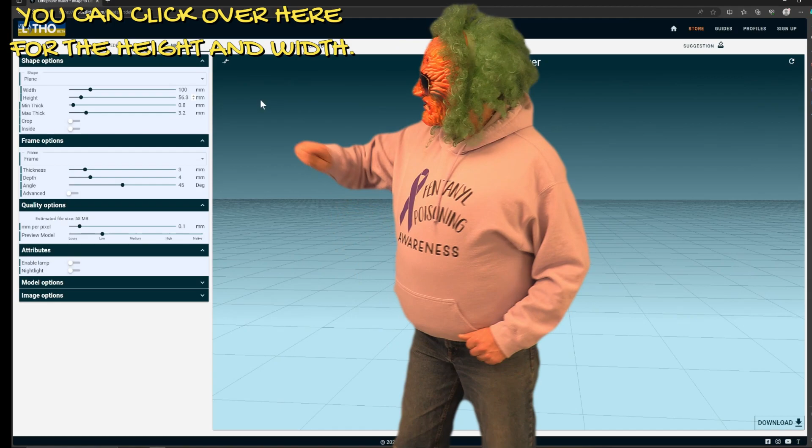Alright, let's spin this bad boy around. You can click over here for the height and width. I'm going to change mine to 100, but remember to log these numbers down, write them on a piece of paper. When you're done with that, click down here to download, then tap over here for Lithophane.

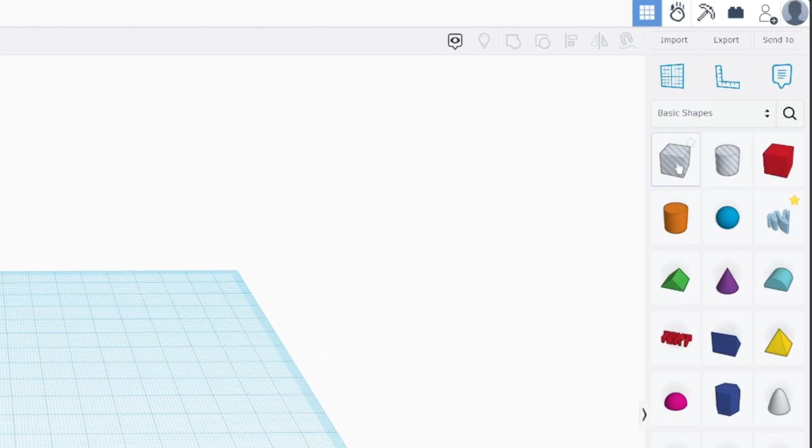Okay, I'm going to show you real quick how to make our brackets. Take a hole here. The hole represents our lithophane. My lithophane measured 177.8 millimeters. I'm going to transfer those values to my hole. My lithophane measures 100 millimeters, so I'll make my hole 100 millimeters. My lithophane is 3.2 millimeters wide, so I'll have to make my hole 3.2 millimeters wide. That's going to be our lithophane.

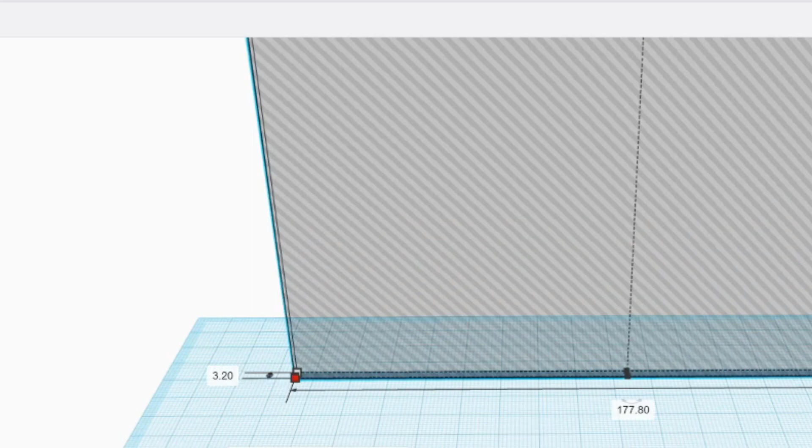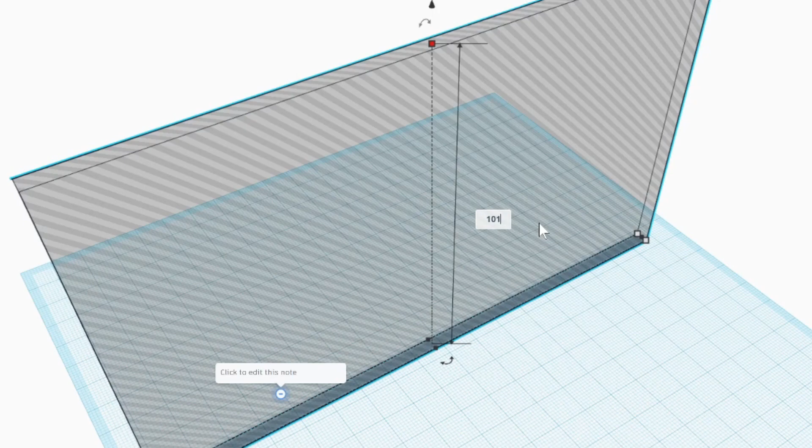But one problem I always run into is when you use your 3D printer, you've got to give yourself an extra millimeter. So I go 4.2, 178.8, and the top 101. That gives us a little wiggle room.

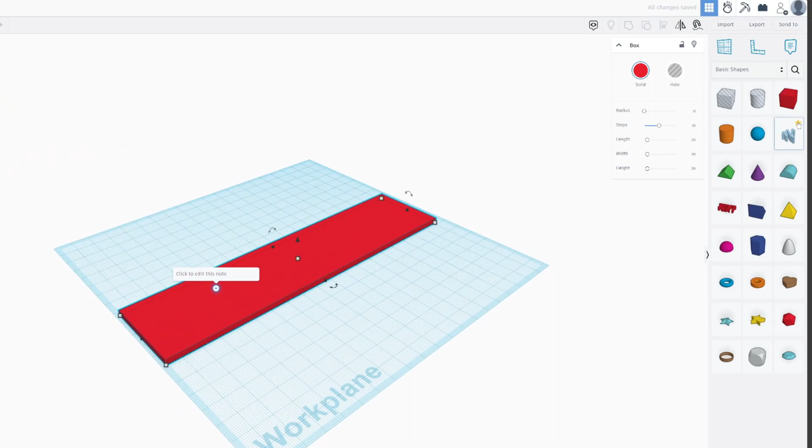Take this, put it aside. We're going to get our bottom: 45, 190, 3. 190, 3. We'll make this 25 high.

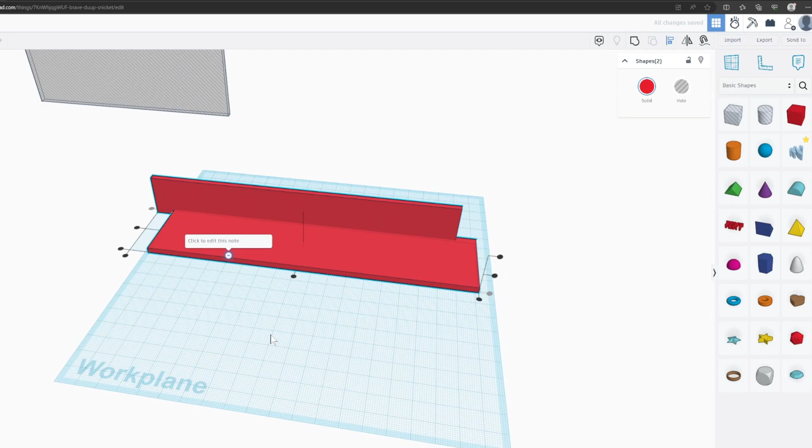Click on the tab to align to the front, and click on the tab to align to the middle. Let's group them. Now let's work on the front.

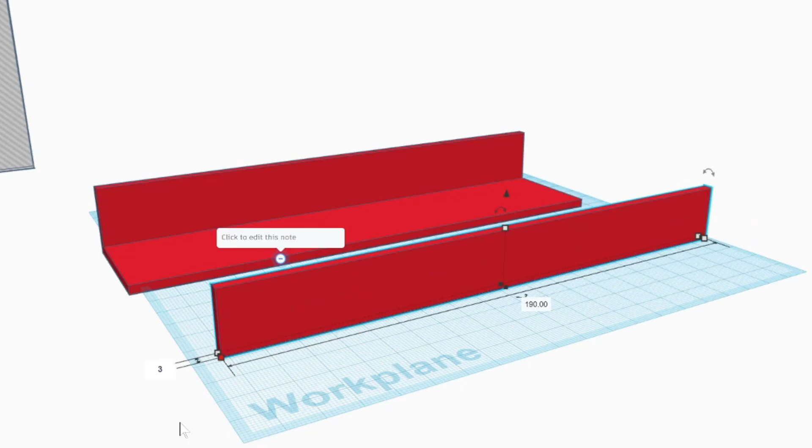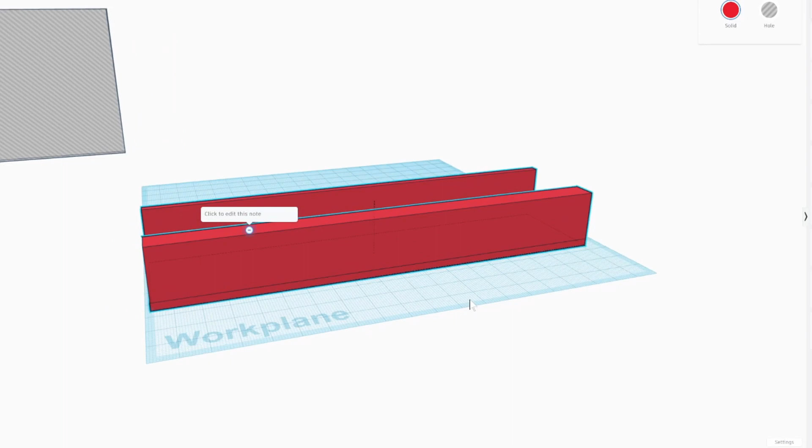190. Make this 3 wide. Actually, make this 10. Make that 25 tall. Now select our pieces and go up to Align. Click on the tab to align to the front, and click on the tab to align to the middle. That looks good. I'll select them, and then we're going to group them, make them one piece.

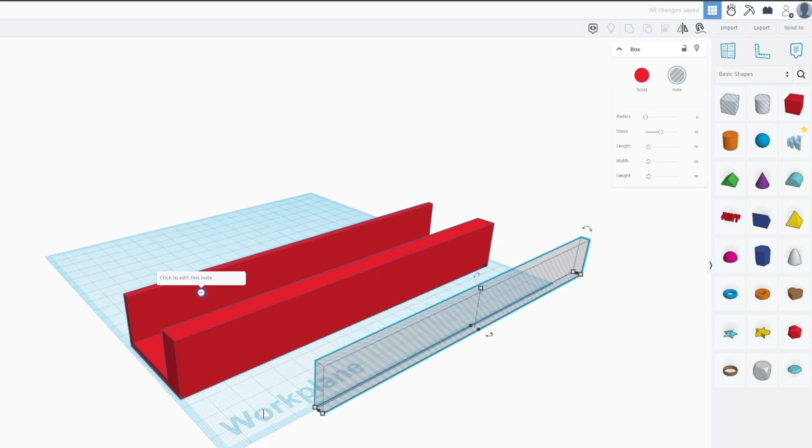Now go grab yourself a hole, and drag it on the work plane. This hole is going to be a channel that the lithophane sits in. Let's make it 4.2, that sounds good. Now I'm going to drag this hole so it's longer than our piece. Next, I'm going to lift it up off the work plane so it's 2 millimeters shorter than our piece. Our piece is 25, so we're going to go to 23.

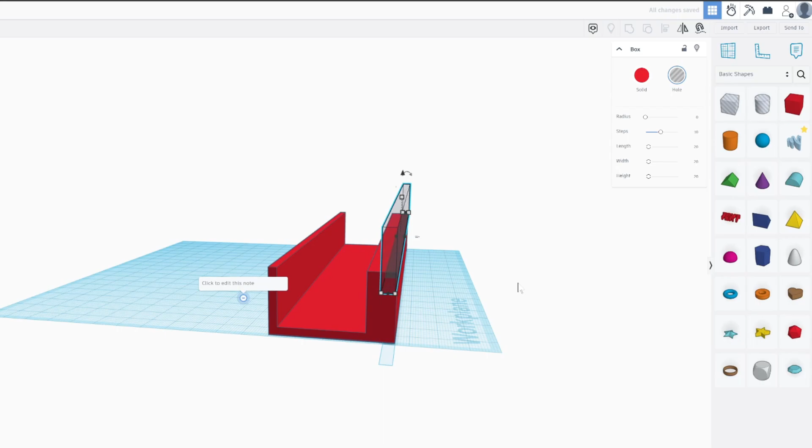What you want to do now is get yourself a side view and use the arrow keys to move it to its center. One back. No, the other way. There, right there. Let's select them, and then go up and group them.

What I want to do now is copy this. Let's select it and go up to copy. After clicking on duplicate, use the arrow key to move the extra piece out of the way. We'll work on that later.

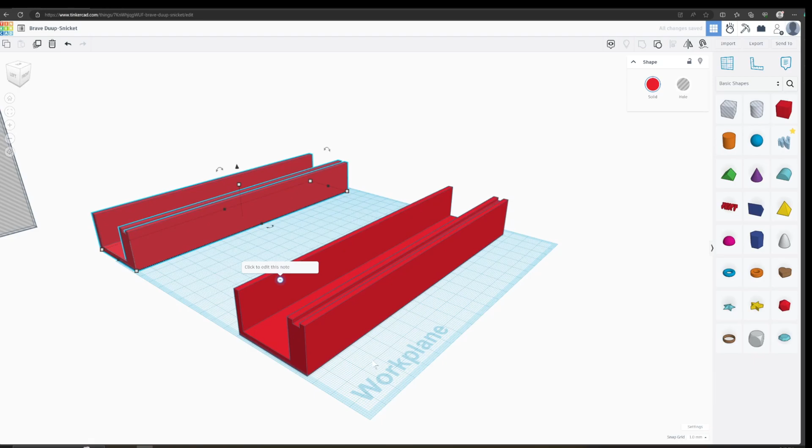Now go ahead and grab that hole we set aside, the one that's the same size as your lithophane. Bring it over there, there you go. Put it right next to that piece. Let's line it up, align, now go ahead and center it. Remember, our red bracket is 25 high. We want to raise this hole to 23 high so that it'll sit right in that groove.

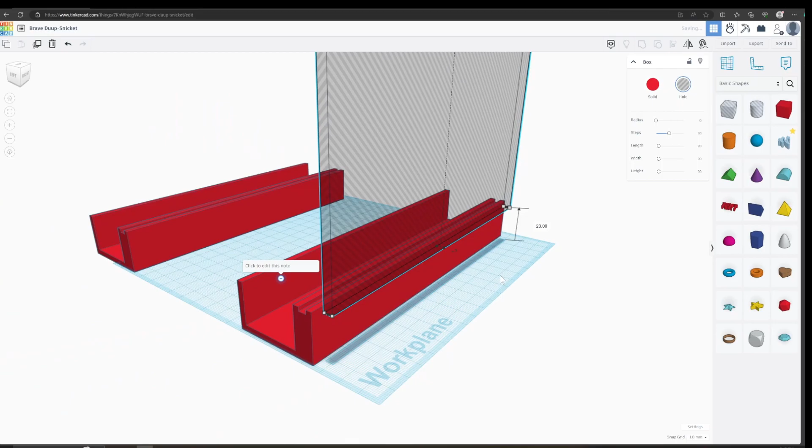What you want to do now is move the plate around until you get a side view. Click on it and use the arrow keys to line it up with that groove there. Ooh, kind of groovy, huh?

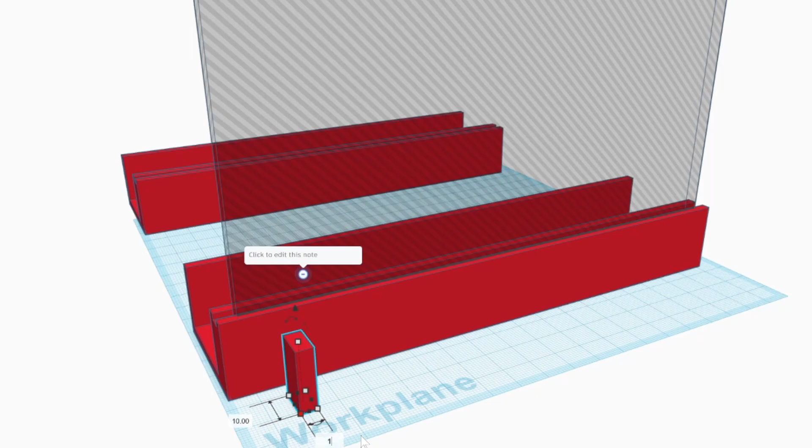Grab yourself another block. We're going to use it as a pillar. Take that block we're using for the pillar and make it 10 by 10. Now take that block and roughly center it right there. We'll use align here in a second.

Now grab your piece and stretch it, so it's about even with the lithophane. Now use your mouse and select just the two red parts and align them, but not the hole. Make sure not to get the hole. Align it to the front and to the side.

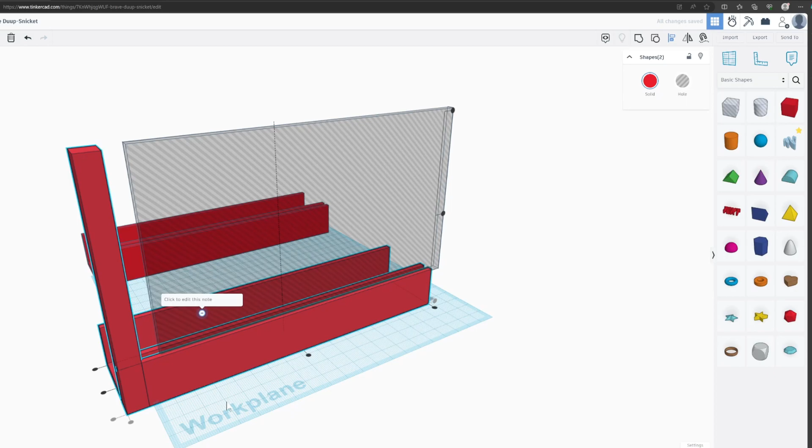Now you're going to click on our little pillar here, and we're going to duplicate it. Go up to the corner and duplicate. Use your arrows and move the copied piece to the other side. And next, we're going to align them too.

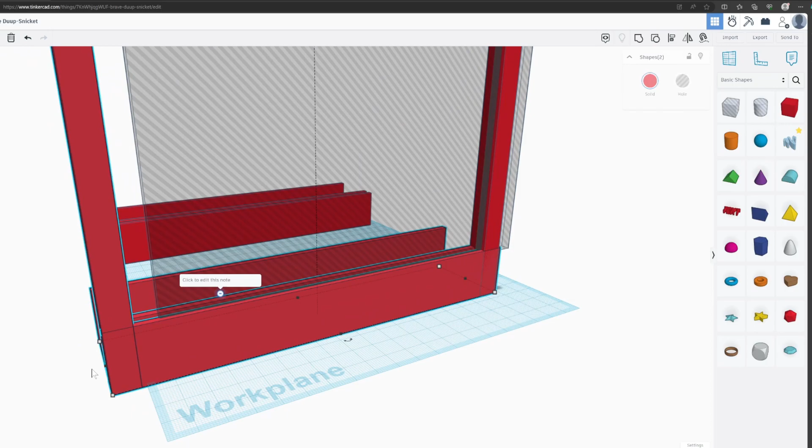So go over to the first pillar, the one that's centered, select it, and then group them. Now go to the second pillar, select them, go up to align. Go to the front, it looks like it's good to the side. Select it one more time and group it.

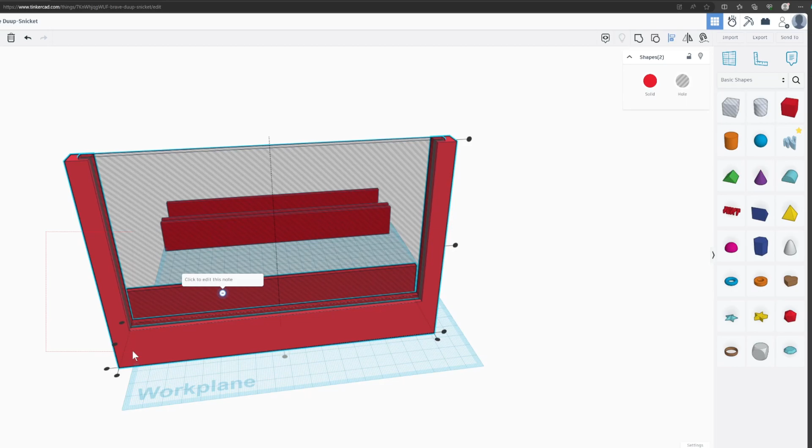I suppose now I better recenter that hole - that's where our lithophane goes. Well, you know the drill. Align, center it. Now let's select the whole thing and go up and group it. Let me move them close together here.

And then we're going to go up to the corner here and name it. What should I call it? How about Charles Lithophane Holder? Over here on the right, go to Export, STL, and it's saved on a disk.

Let's open it with Cura. Now that Cura's open, go up to File, Open Files. Ooh, look, Charles Lithophane Holder. There it is.

Check your settings, are they what you want? I made another video about that. Slice. 1 day, 1 hour and 47 minutes. Ooh, that's a long time.

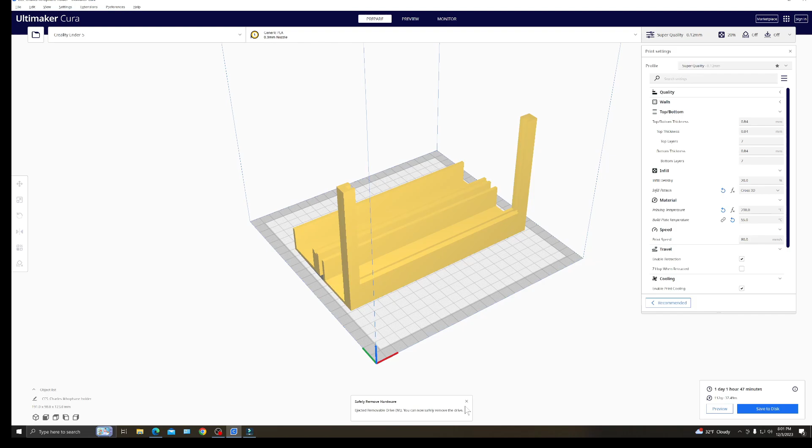Put your thumb drive in. Safely remove, click eject. Take your micro SD card to your 3D printer and let's go print. Alright, I already leveled the bed and preheated it. I'm gonna put my micro SD card in.

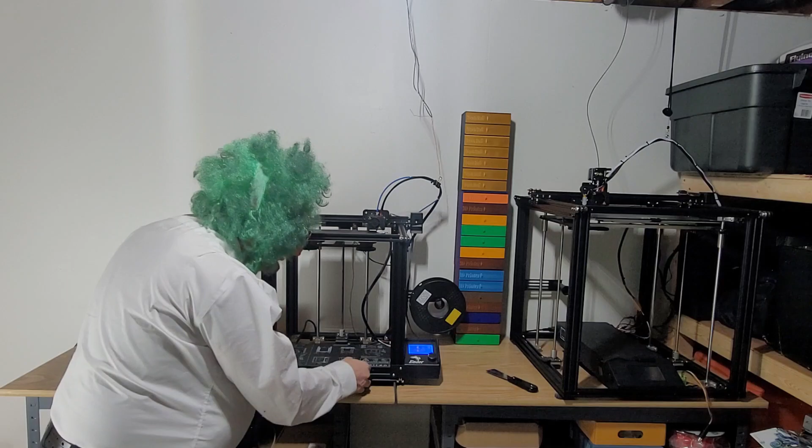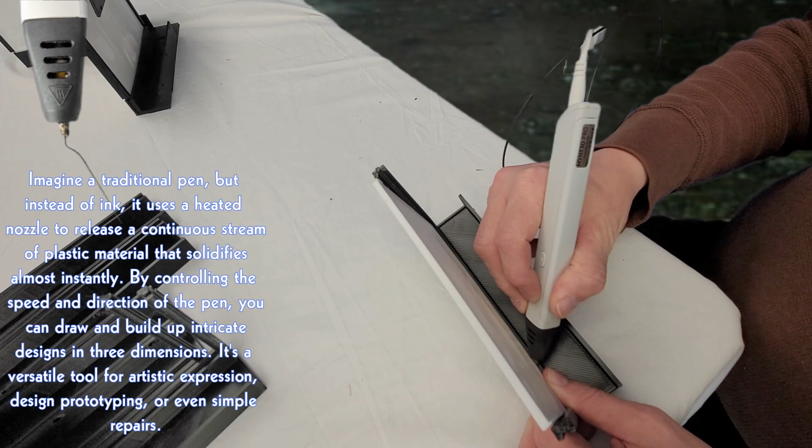Part 3, assembly time, man. We're gonna weld these together with a 3D pen. See how that works? It's welding them together. It won't come off. See how quick that is?

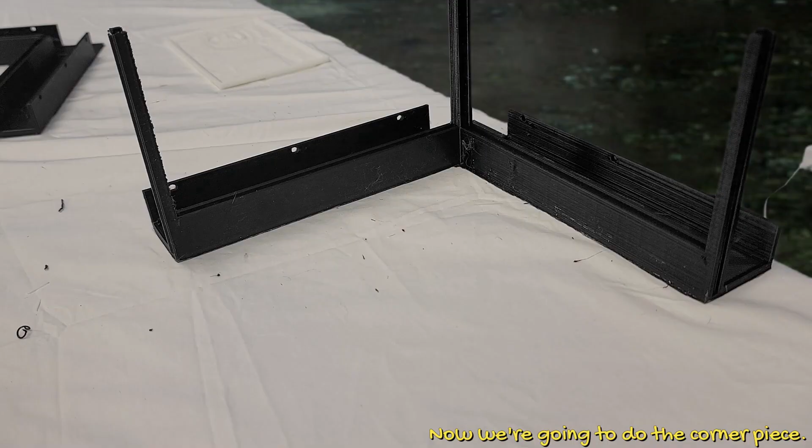I'm gonna put the top on. How's that look, huh? Now we're going to do the corner piece. Put that picture in there and turn around.

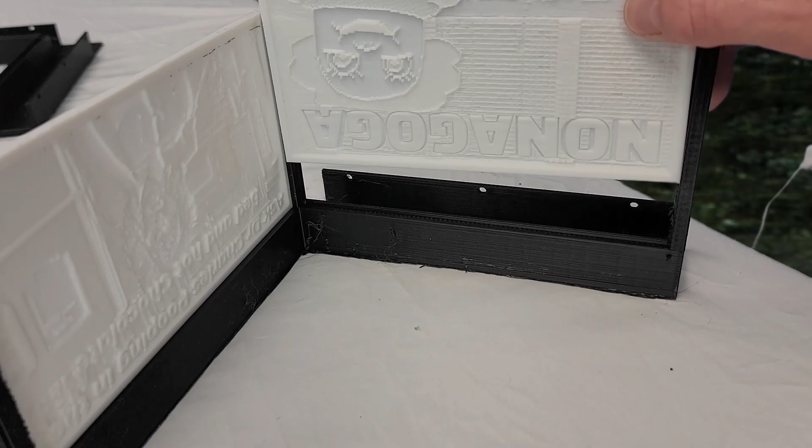Just like that. Now we gotta put the other one in. You get the picture.

See that? Those are LED strips. You can even change the color on them. I'm gonna take our lithophane and put it over them. But first, you gotta hot glue them. So let's get it gluing away.

Put a big bead on here. Make sure you got the right way up. You have to hold it for a couple seconds.

Alright, now let's get the next one out. Make sure they're not upside down. Just like that.

After you got your lithophanes hot glued up there, grab your 3D pen. We're going to seal the edges here. Don't want any light to come through. Just like that. And look at that - lithophanes all around my wall.